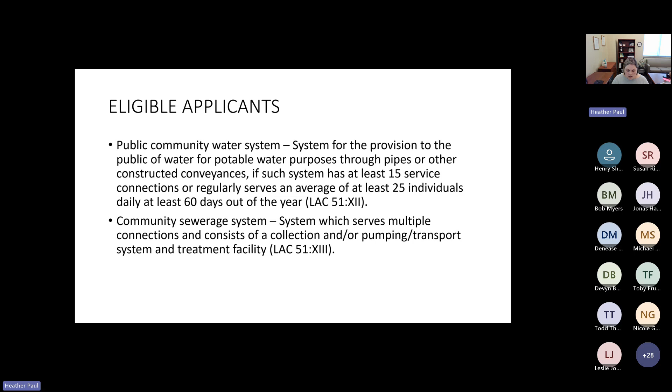Eligible applicants are public community water systems. Those are systems for the provision of water to the public for potable purposes through pipes or other constructed conveyances, if such system has at least 15 service connections or regularly serves an average of at least 25 individuals daily, at least 60 days out of the year. A community sewerage system is a system which serves multiple connections and consists of a collection and/or pumping or transport system and a treatment facility. Those are the only eligible applicants.

Ineligible applicants are for-profit public water systems and/or community sewer systems, and any water or sewer system that received funding in the Water Sector Program rounds 1 or 2, with the following exceptions: if a system was funded under round 1 or 2, it may apply if it's going to consolidate one or more other systems. Or if the system was funded in round 1 as a result of a capital outlay application and didn't receive funding for the same system during another part of round 1 or 2. This is pending Water Sector approval, but projects that were terminated by the Water Sector Commission - if you were previously awarded and the project was terminated by the commission, you're still eligible to apply. They'll be reviewing that guidance caveat at their meeting on Wednesday, and we expect that it will be included.

Funds: these applications are actually being accepted in anticipation of funds being appropriated in the next legislative session. So they should be state funds, but there is currently not an allocation set aside for them.

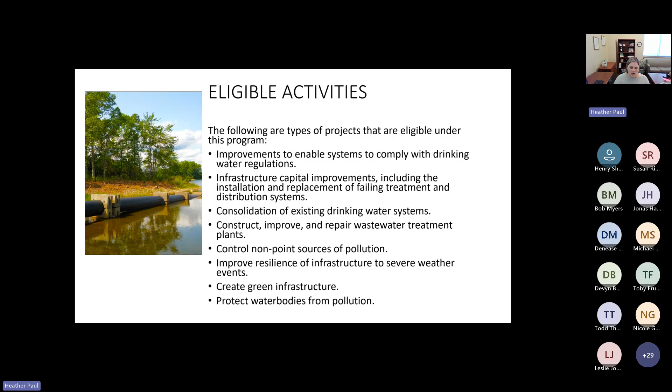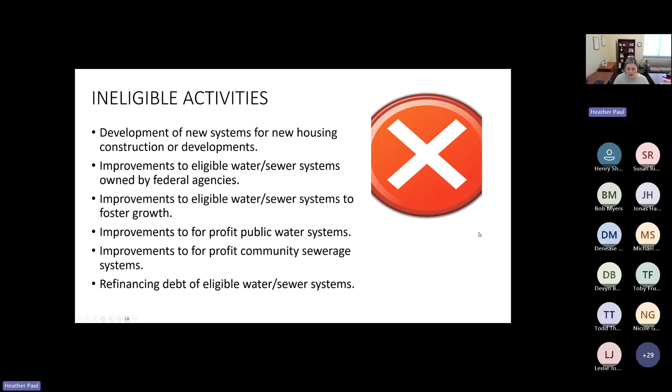Ineligible activities include the development of new systems for new housing construction or developments, improvements to eligible water or sewer systems owned by federal agencies, improvements to eligible water or sewer systems to foster growth, improvements to for-profit public water systems, improvements to for-profit community sewer systems, and the refinancing of debt of eligible systems.

Applications will be submitted via the online portal. Water applications will be reviewed by the Louisiana Department of Health, and sewer applications will be reviewed by DEQ. Applications will be scored based on documentation submitted and data available to reviewing agencies. Late applications will not be accepted. Once you've submitted your application, no additional information or documents can be submitted to the working panel unless requested by a member of the working panel.

Funding recommendations will be provided to the Water Sector Commission based on 3 separate tiers of the population of the water or sewer system: less than 3,300; 3,301 to 10,000; or greater than 10,000. Those applications are broken down and recommendations are made based on that. The population of a water or sewer system is determined by multiplying 3 times the number of active service connections. On a case-by-case basis, population can also be determined using census data, for example when a system does not service customers outside of the corporate limits of the municipality.

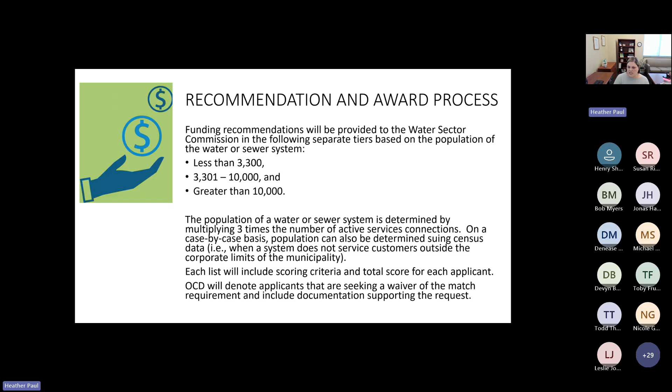Each list will include scoring criteria and a total score for each applicant. OCD will denote applicants that are seeking a waiver of the match requirement and include documentation supporting the request, which we'll go over in a second.

A 25% match is required for all proposed projects. Applicants may request a waiver or a reduction of the match in the online portal. Final recommendations regarding a waiver or reduction of this requirement will be made by the Commission to JLCB.

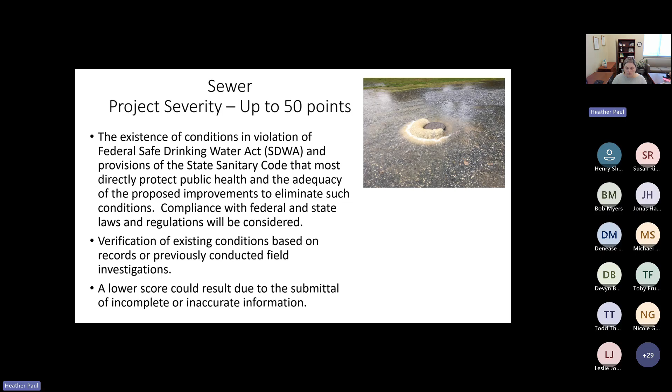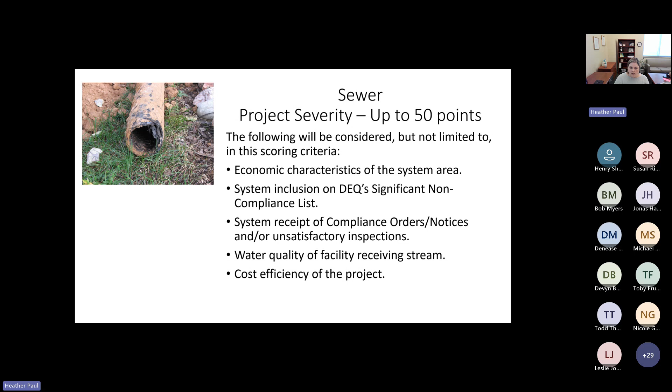We're looking at sewer first and then water, so these are all regarding sewer. The following information will be considered, but not limited to, in this scoring criteria: economic characteristics of the system area, system inclusion on DEQ's significant non-compliance list, system receipt of compliance orders or notices and/or unsatisfactory inspections, water quality of the facility receiving stream, and cost efficiency of the project.

For consolidation, up to 20 points: consolidation of 2 or more existing water or sewer systems into one larger system. The responsible consolidated system must own, operate, and maintain all other systems post-consolidation. The score is calculated in consideration of the average daily flow of outfalls eliminated.

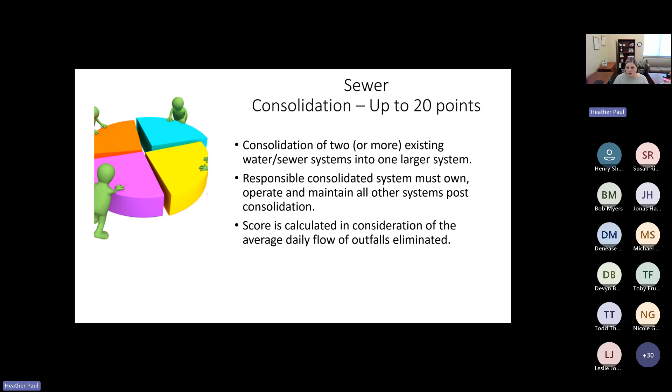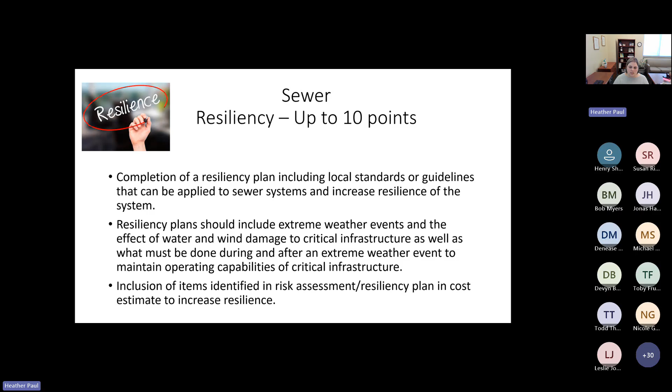Sewer resiliency is up to 10 points: completion of a resiliency plan, including local standards or guidelines that can be applied to sewer systems and increase resilience of the system. Resiliency plans should include extreme weather events and the effect of water and wind damage to critical infrastructure, as well as what must be done during and after an extreme weather event to maintain operating capabilities of critical infrastructure, and the inclusion of items identified in risk assessment and resiliency plan in cost estimate to increase resilience.

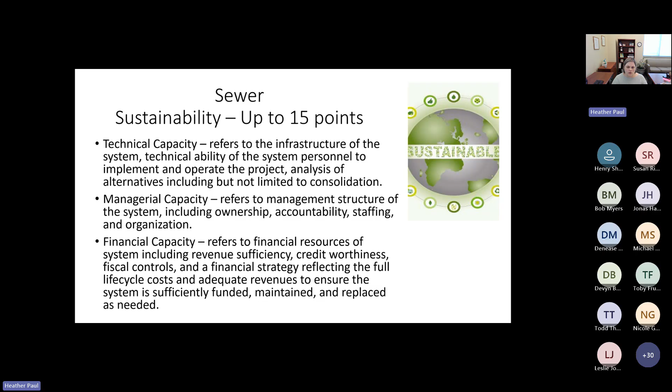Sewer sustainability is up to 15 points. These items will be considered: the technical capacity, which refers to the infrastructure of the system and technical ability of system personnel to implement and operate the project, analysis of alternatives including but not limited to consolidation, the managerial capacity, which refers to management structure of the system including ownership, accountability, staffing, and organization, and the financial capacity, which refers to the financial resources of the system including revenue sufficiency, credit worthiness, fiscal controls, and a financial strategy reflecting the full life cycle costs and adequate revenues to ensure the system is sufficiently funded, maintained, and replaced as needed.

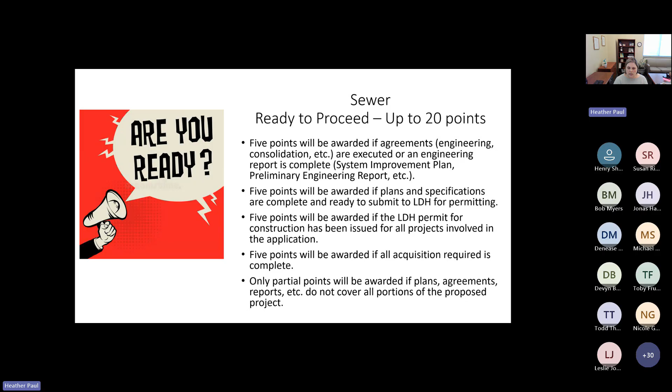For ready to proceed, it's up to 20 points, and there's 5 points for each of the items possible. 5 points will be awarded if the agreements are executed or an engineering report is complete - so if your engineering or consolidation agreements are ready, or if you have a system improvement plan, preliminary engineering report, etc. Then there's another 5 points possible if the plans and specifications are complete and ready to submit to LDH for permitting. There's another 5 points that can be awarded if the LDH permit for construction has been issued for all projects involved in the application. And another 5 points will be awarded if all acquisition required is complete. If it's only part of the project or portion of the proposed project, only partial points can be awarded.

Match documentation is up to 10 points. Points will be awarded if documentation that matching funds are available to be spent is included in the application. Closing documents must be included when loans are being used as matching funds to be awarded - it cannot just be a bank statement. We did have that a lot last time. Just because your funds are available right now in your bank account doesn't mean that that's what their intent is. So make sure that if you're counting on that, you have a resolution or something like that to show that that's what the funds are for.

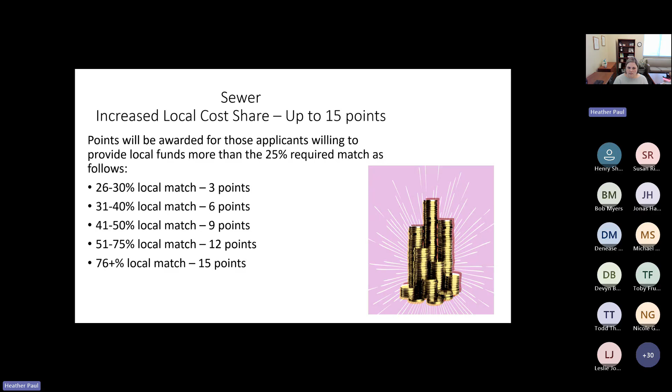The increased local cost share is up to 15 points. So remember that 25% is what's required. If you're going over that and it's 26 to 30, you get 3 points. 31 to 40 is 6 points. 41 to 50 is 9 points. 51 to 75 is 12. And anything over 76 is 15 points.

State funds, as a reminder, cannot be used in the match calculation. Your other funds need to be local, private, or federal in order to be calculated as increased local match or as your match.

For water, for severity, it's up to 50 points available. Project severity is the existence of conditions in violation of the Federal Safe Drinking Water Act and provisions of the state sanitary code that most directly protect public health and the adequacy of the proposed improvements to eliminate such conditions. Compliance with federal and state laws and regulations will be considered. You'll provide a list of existing violations and issues to assist in the evaluation of the existing condition of the system and any available documentation that supports the severity of the existing issues - for example, personal statements from residents on the system, news articles, social media posts, etc.

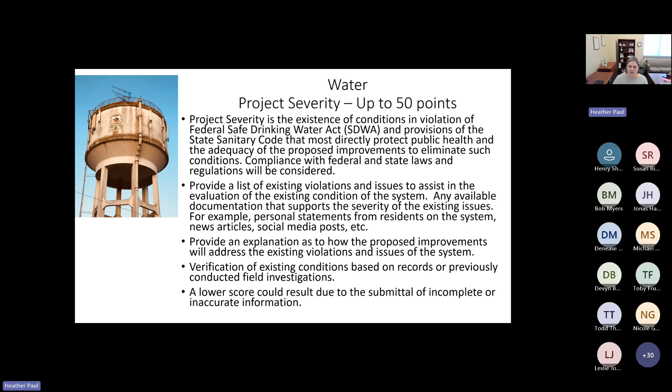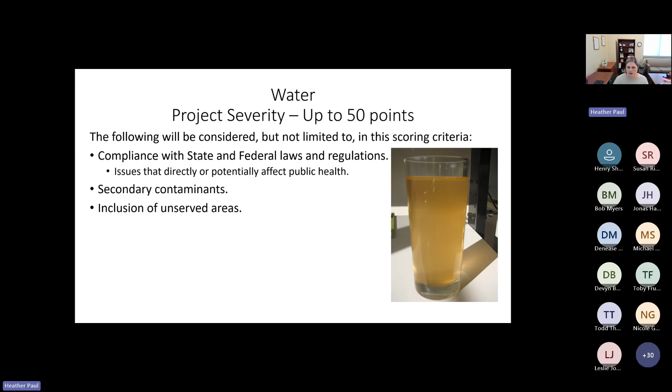Provide an explanation as to how the proposed improvements will address the existing violations and issues of the system. Verification of existing conditions based on records or previously conducted field investigations. A lower score could result due to the submittal of incomplete or inaccurate information. Again, for severity, the following will be considered but not limited to: compliance with state and federal laws and regulations, issues that directly or potentially affect public health, secondary contaminants, or inclusion of unserved areas.

For consolidation, which is up to 20 points, if you're consolidating 2 or more existing water systems into one larger system, the responsible consolidated system must own, operate, and maintain all other systems post-consolidation. Purchase-only systems or bulk sales systems are not considered a consolidation. Applicants should include a discussion of the options for consolidation of the system with neighboring systems in order to result in a more sustainable, resilient system. Any agreement for consolidations that are in place or currently being executed should be uploaded with the application.

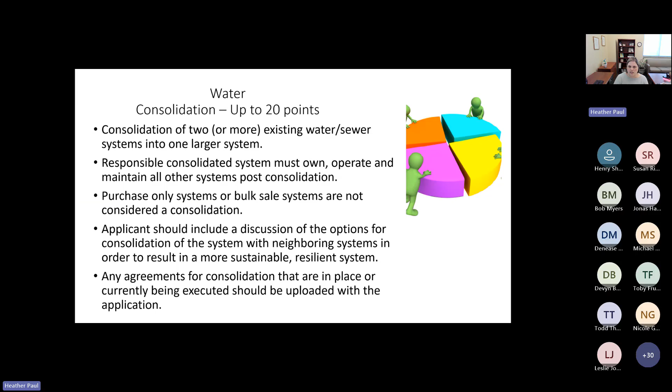Resiliency is up to 10 points: completion of a resiliency plan or risk assessment, an emergency response plan, including the local standards or guidelines that can be applied to water systems, and increase resilience of the system. Resiliency plans should include extreme weather events and the effect of water and wind damage to critical infrastructure, as well as what must be done during and after an extreme weather event to maintain operating capabilities of critical infrastructure. Inclusion of items identified in risk assessment and resiliency plan in cost estimate to increase resilience. The state sanitary code requires systems have standby power.

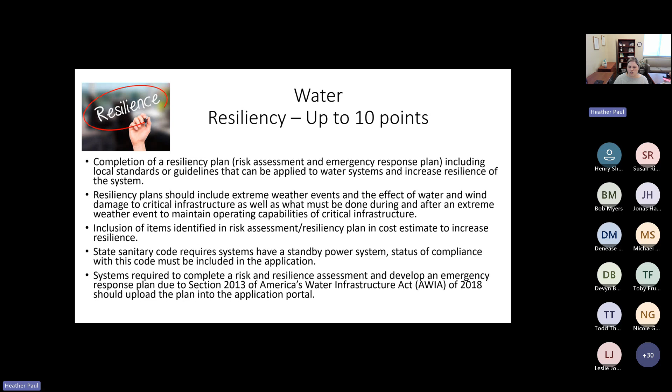A status of compliance with this code must be included in the application. Systems required to complete a risk and resilience assessment and develop an emergency plan due to Section 2013 of America's Water Infrastructure Act of 2018 should upload the plan into the application portal.

For sustainability for water systems, there's up to 15 points available. Technical capacity refers to the infrastructure of the system, the technical ability of the system personnel to implement and operate the system or operate the project.

For ready to proceed, there's also 20 points available, and it's broken down the same way as sewer. 5 points will be awarded if the agreements are executed or an engineering report is complete. That's the system improvement plan, preliminary engineering report, etc.

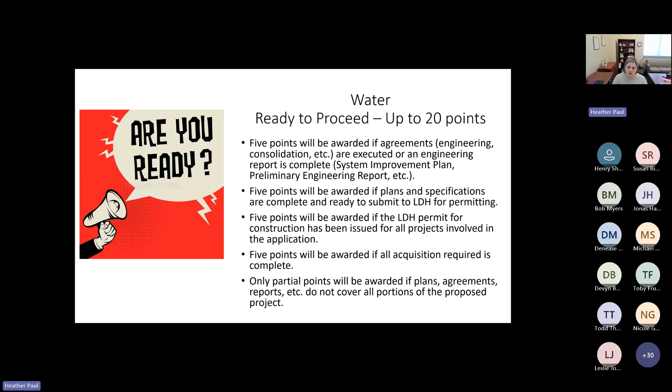5 points will be awarded for plans and specs that are complete and ready for LDH to permit. 5 points will be awarded if the permit for construction, the LDH permit for construction, has been issued for all the projects involved in the application. And 5 points are available if acquisition is complete. Only partial points will be awarded if plans, agreements, reports, etc. do not cover all the portions of the proposed project.